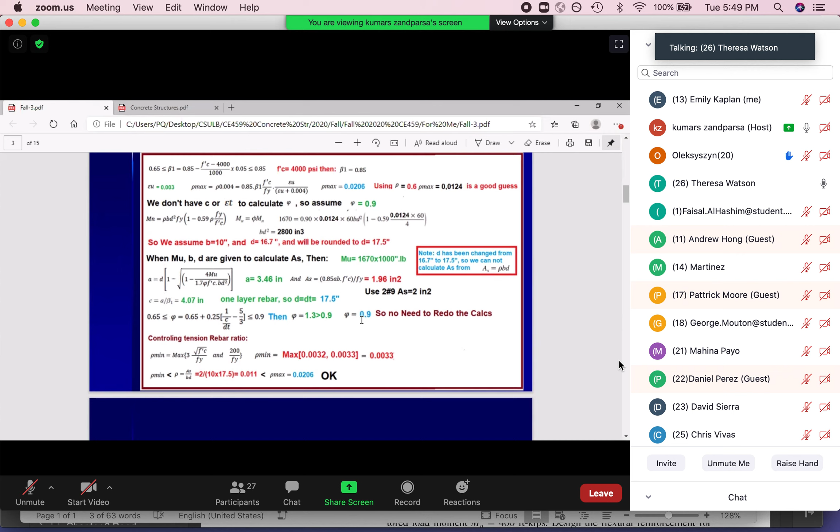Clear? Professor, similar to that question, what would be considered unacceptable then? You said if it's really large, if it's 10, it's fine, just use 0.9. What about if it's under 0.65, is that unacceptable? Not important. Just calculate your phi. There is no limit here that phi should be less than a number. Just when you are going to use this phi, your phi must be less than or equal to 0.9. That's it. If it's 1 point something, don't think about that. Do not use phi greater than 0.9.

Yeah, and why? Because look at this: Mu is equal to phi Mn. If you use phi more than 0.9, if you use, for example, 1.3, it means that the ultimate moment capacity is greater than the nominal moment, and the ACI doesn't like that. The code stops us. We want a factor of safety, not reducing the factor of safety. If you go with phi larger than 1, it means that we reduce the factor of safety.

Is that clear? That part makes sense, but a follow-up question would be: you were describing that iterative process of recalculating phi. How would we know that it's not acceptable and we need to go through that iterative process to recalculate phi? Or are you saying we just don't do that? Yeah, there is no need to do that. Actually, I'm not sure if I understand your... It's because in the last example you wanted us to go through the iteration because we got 0.78, and you said we would have to redo the calculations, but in this scenario we don't.

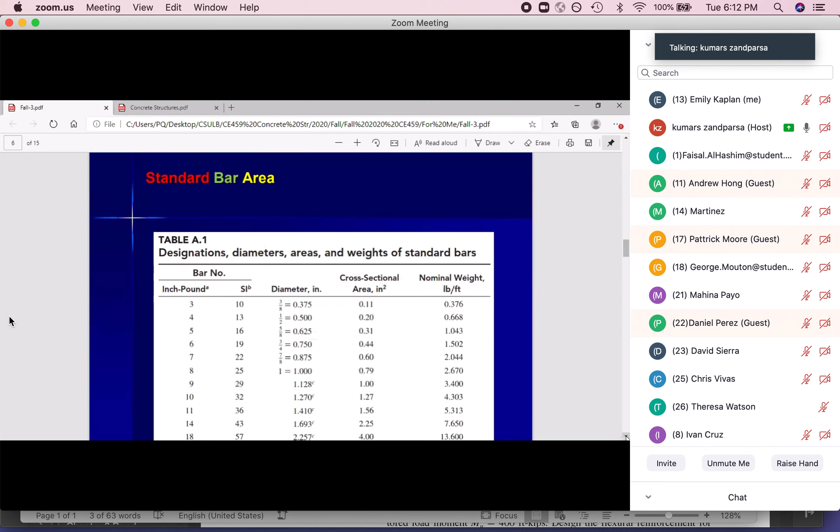Okay, let's go on. These are the rebar that I told you, I put that here just for you. And right now I'm going to solve some examples. I have to cover a lot of stuff. We want to determine the moment capacity for a beam where you have everything. So it's based on the as-built. We know the size of the bar, we know everything, and we want to calculate the moment capacity of this beam.

Okay, we know everything: rebar, compression bar, that's A's. Look at this. 2 number 8, A's from the table, times 0.79, that's the total area. 6 number 10 means 6 times this, the total cross-sectional area. Now I showed you dt, look at this, you have 2 layers, dt and d. d to the center, dt to the bottom.

And we consider 2.5 here, and 24 to this side. You know dt and you know d. So dt is the total h, 28, minus 2.5, and d is 24. And what's d prime? 2.5.

This is your D prime, 2.5. So, let's start to see the step by step that I gave you. I put that here, so if you follow that, you will not miss anything. So at first, calculate the tension bar ratio. Rho is As divided by BW times D, but because here it is rectangular, B is equal to BW. We have everything here, percentage of the rebar.

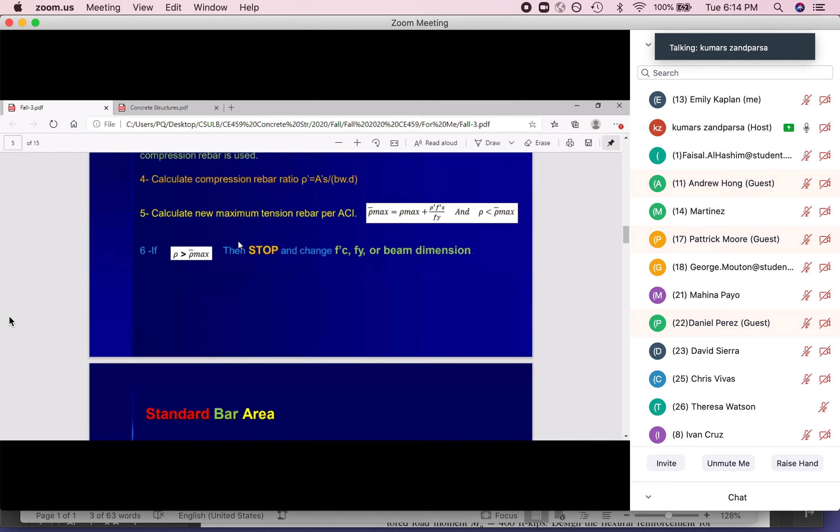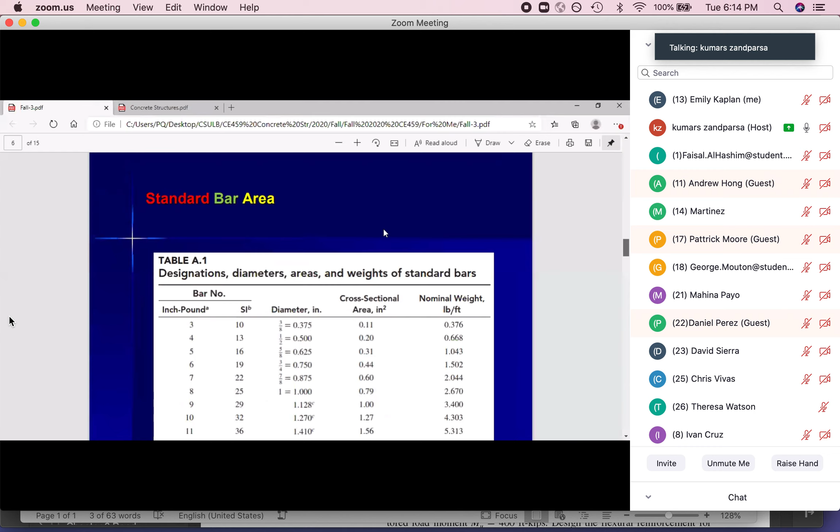Look at this. In the last section, if rho was greater than rho bar max, even with compression, stop, your beam is not acceptable. You have to do something. Okay, so we check this and we notice that the tension bar is more than we need. So what can we do?

Then for this one, assume f prime s equals fy. You can go with any number, but it's always better to go with fy. But if you like the challenge, go and do it yourself with something else to see how you can get the same answer. You have to get the same answer if you go with any number. But it can't be more than fy. Just remember, it cannot be more than fy. Fs or f prime s must be less than or equal.

Okay, and that's the equation for a. These are the equations that you need to write on that paper. That's your a. Put all these numbers, you have everything. You can find a. a divided by beta 1, that's your c. Perfect. Then go and see if f prime s is correct or not. So this is the equation, epsilon prime s times Es. Es is 29,000 or 30,000. I gave you here 29,000.

So 63.8 is not acceptable. It's more than fy, so your f prime s is equal to fy. Like when phi was greater than 0.9, you should go with 0.9. So in this case, we assumed it is equal to fy, so we are good. If it was less than fy, we should redo this, because we assumed fy, but if instead of 63.8 we got 52.8, we should use f prime s equal to 52.8, because it must be less than or equal to fy. If it's less, go with the less. If it's more, consider it equal to fy, the same as phi. I'm repeating to make sure it goes inside you and you cannot forget this.

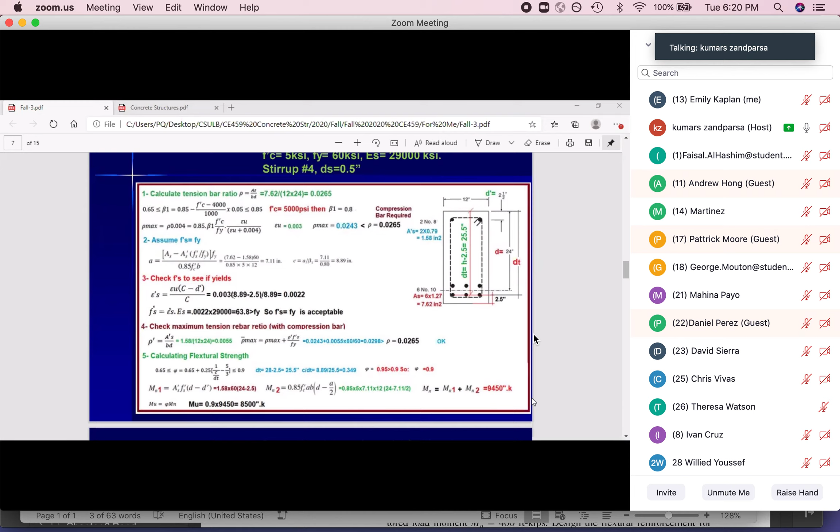So when you find the moment capacity, you are done. You can compare that with whatever you want. Okay, let's go to another example. So in this example, did the stirrups... in that last example, I didn't see them pop up in any of the calculations. No, it's another chapter. We need one chapter for stirrups. This is just bending moment, not for shear. I will go through that in maybe the next 2 weeks.

Okay, so we are going to determine the steel areas for the rectangular beam according to the ACI code. Dead load, live load, simply supported 18 feet. Simply supported means tension at the bottom. B, H, we know everything. And the stirrup number, I gave you a stirrup, because the number of the rebar that you are installing must be matched with the code, whether you can install it or not. So in this case, we are going to determine the steel.

Let's start with this system first. The weight of the beam is included because we didn't mention to consider the self-weight of the beam. So it's included. So w_u is 1.2 dead plus 1.6 live, and Mu, because it's simply supported, is wL squared divided by 8. That's for a simply supported beam. So this one times L to the power 2 divided by 8, that's 211 foot-kip times 12, inch-kip. Times 1,000 would be inch-pound, but we start with kip. Inch-kip, that's the moment.

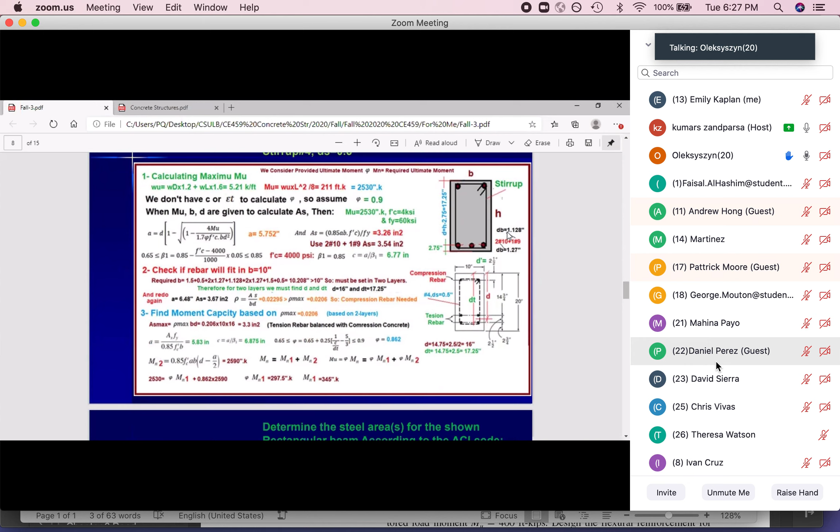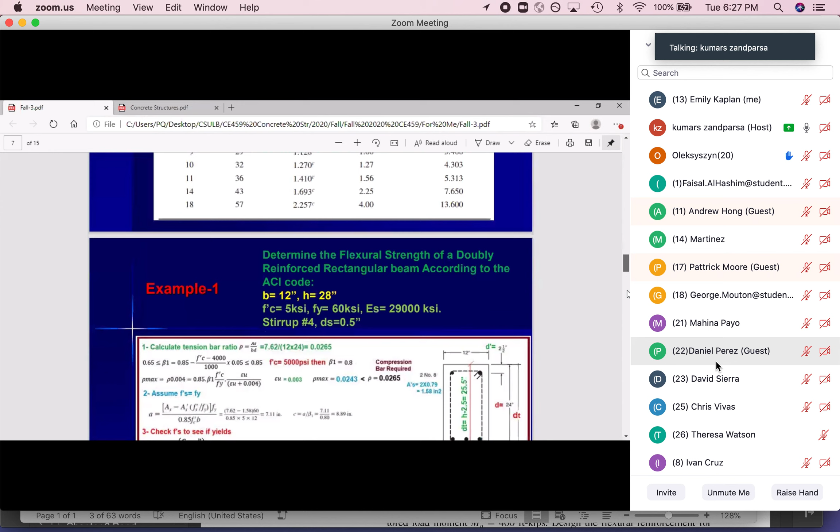From the table for number 9. Go to that table, you can find the diameter. This is the table that I put here. Number 9, diameter 1.128. Number 10, diameter 1.27. Okay, I thought it was the clear cover for those. No, those are the diameters. Look at this, I show that these are for these numbers. So we add them all together, you will get 10.2, and it is greater than 10.

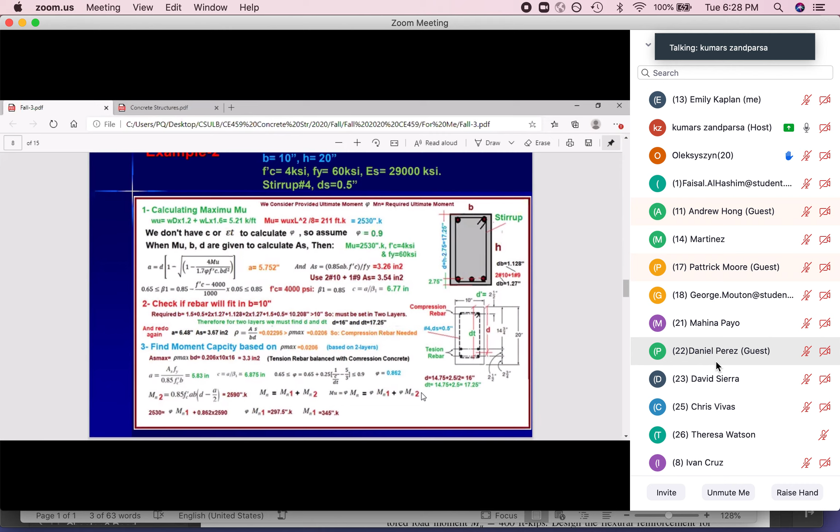So 1 layer is not acceptable. Always you have to check; you can't just put as many rebar as you want and say that's okay. We have to check it. And it's not good, so we have to go with 2 layers. In this case, with 2 layers, based on all these dimensions, I wrote how to calculate D and how to calculate DT. These are the calculations here.

So I will go with 2 layers, and in this case, again with number 4, it should be for sure okay. You don't need to check that anymore because it's very close. If you remove 1 bar, you have enough distance. So in this case, based on this A that we calculated, we have to recalculate everything. We changed a lot, so we have to use a different D. Go to this equation again with the same Mu but different D. Everything is the same except D.

D was, where did I write that D for you? Let me see if it was in the example. Yes, you can see that's correct: D equals H minus 2.75. So you have this D with 17.25. But in this case, we changed that D to 16 inches, so we have to redo everything based on the new D, and we will go to this equation.

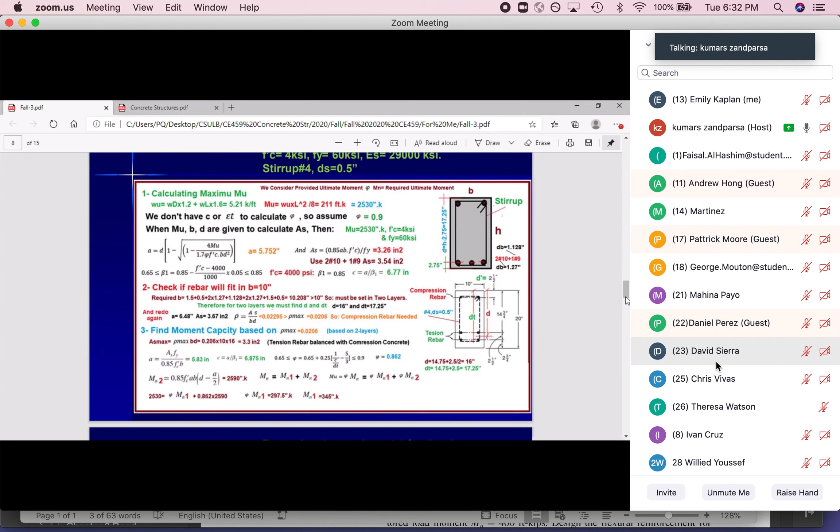Then find Mn2. Mn2 is based on the concrete and the tension rebar. This is a good example for design. At first, I go with the maximum rebar for the tension bar. Then the rest of the load goes to the compression, and you can find the compression bar. So this is the tension bar part. Look at this, let me show this one more time.

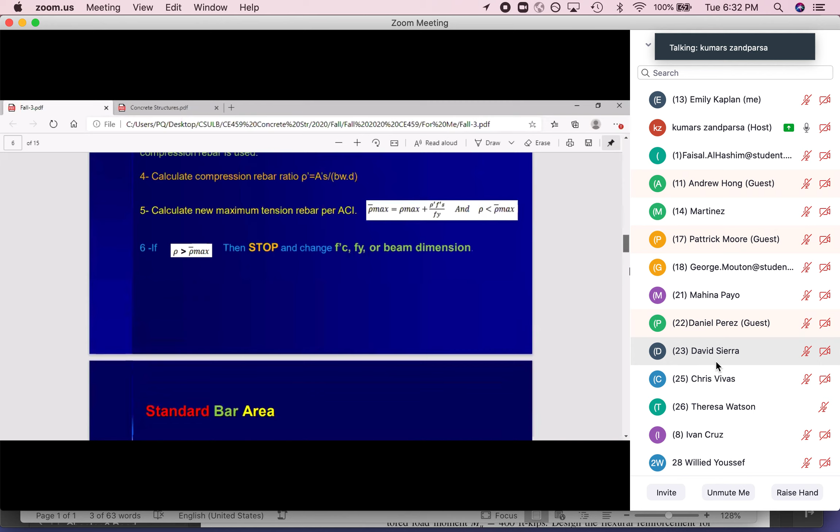Look at this, the bar. Mn2 will come from the tension bar, and for this tension bar we consider rho max for the tension bar only. So with that tension bar only, we calculate Mn2 = 0.85 f'c a b. We calculate a and b. You find this is inch-kip. f'c is in ksi, so at the end you will get inch and kip.

And we know that the nominal moment capacity is Mn1 plus Mn2. We calculate Mn2, and we know the total moment required, 2530 inch-kip. This is the required, so that's our Mu for this side. So I will write this times phi. Mu capacity is phi Mn equal phi Mn1 based on the compression bar plus phi Mn2 based on the tension bar.

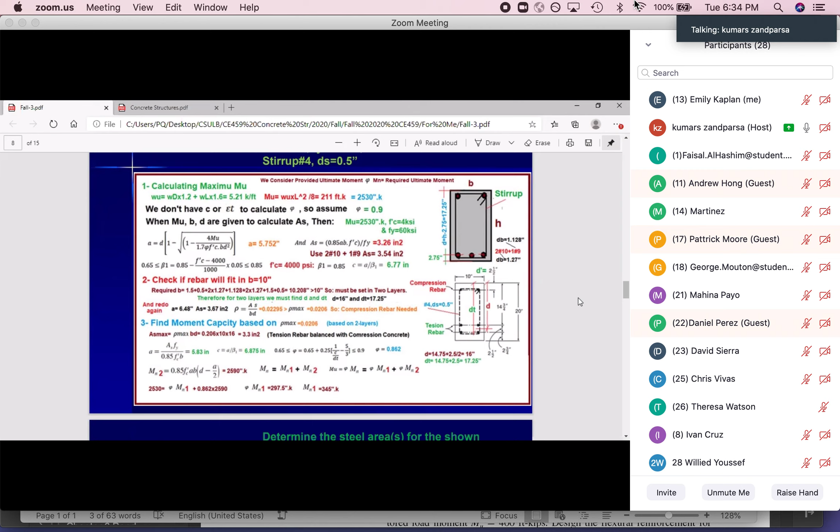So we calculated phi Mn2. We know Mu based on the loading. We want the provided to be at least equal to the required. So required here, phi Mn1 plus phi Mn2, means this one times phi. 0.862, that's our phi. So from here you can find phi Mn1, the moment capacity coming from the compression part, because phi Mn1 is for the compression part. How can I find Mn1? This one divided by phi. So right now we have Mn1, and we want to calculate the rest. You have to come up with the rebar.

Yes, what's the question? Where did we solve for Mn1? Look at this. Mn1, this is the equation. Mn is equal Mn1 plus Mn2. Then, because I always want to use the ultimate moment from loading, times phi on both sides. So you will get Mu. Then this is your Mu, this is your Mn2, this is your phi Mn1. From here, that's the required phi Mn1, then the required Mn1. Then go after this one.

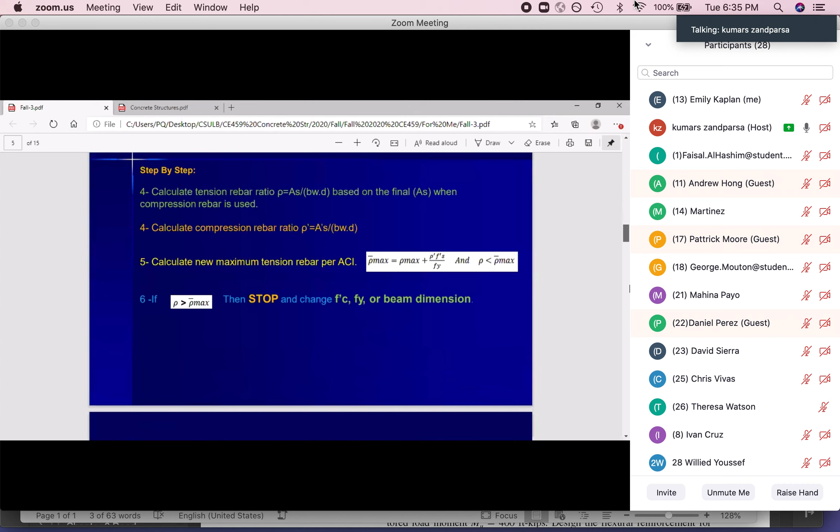Let's go back, and with that equation, I want to find A's because I know Mn1. We calculated it on the last slide. So I rewrite this based on A's, plug in the numbers, and you can find 0.462 square inches. But most of the time it's too small a rebar, and it's better not to use that. We went with 2 number 6, which is much bigger than this. This is experience. Why are we not using that small? Because those are very teeny tiny rebar.

If I use those too small, during construction you are walking over these beams. You can bend them, and you will lose the distance d between compression and tension rebar. If you make it smaller, the capacity will reduce. Because of that, with our experience, even if we don't need this big, we will go with 2 number 6 to make sure if they walk over those rebar on top, they cannot bend them easily. That's the reason why we pick much bigger. But for the bottom rebar, it should be close.

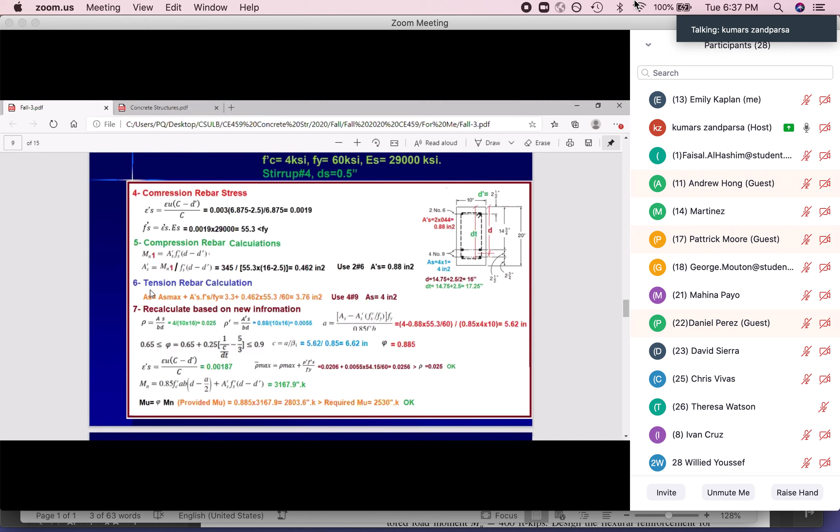Then the tension rebar calculation. How can we calculate tension? We assume As is equal to As max, 3.3. Then plus this rebar, A's times f's divided by fy. So it should be 3.3 from As max plus A's f's over fy. We calculated it here, based on this. We used that number, but you don't need to go with this because it's too big.

We don't need that. We need this one. Just remember, in this equation, whatever you need, don't go with that. Go with this, because we don't need this big. We did that based on experience. So in this equation, go with what you need based on the calculation.

So A prime is 0.462 times f's. You can do this one. So this is the rebar that we need. We will go with 4 number 9, total AS 4 square inches. Then I have to check if it's not less than rho bar max. So I calculate rho bar.

Rho is AS, what we use, over BWD, that's rectangular. Rho prime, do the same with this number, what we used, in this case, because we used bigger. And this one is good too. Look at this. If I use bigger, rho prime will increase rho bar max. That's one of the solutions.

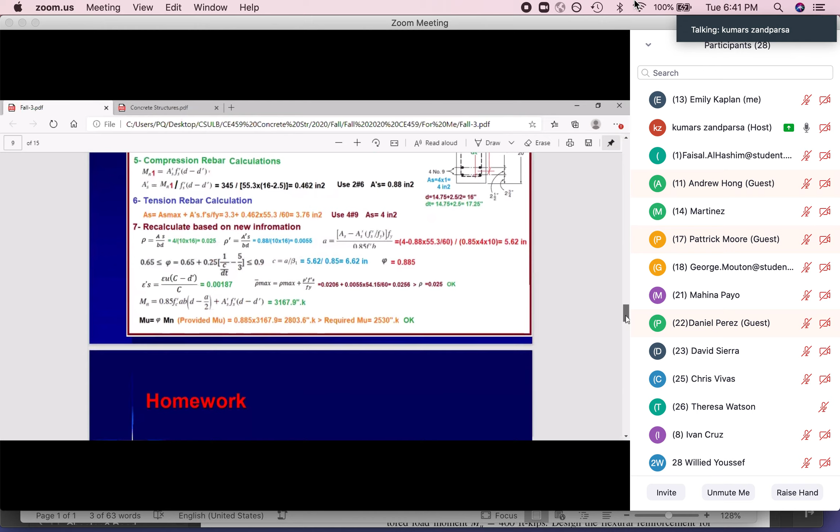That's the solution. You can see this part is not as easy as the tension one, and you have to do harder work on this one. It's not that easy. And like before, please work on the examples, try to solve them by yourself. Then go after the homework. Otherwise, you will get more problems on the homework, and you'll see why you can't solve them. Maybe you cannot solve the examples as well. Just try those first, and then go after the homework.

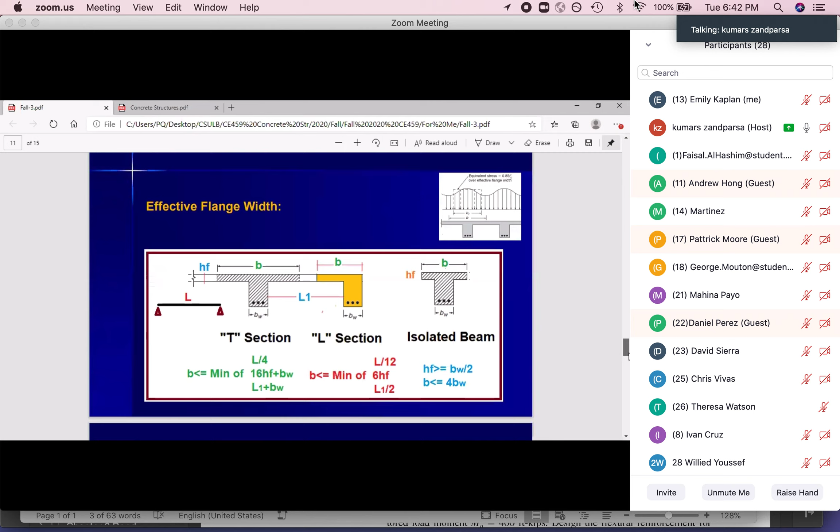And yes, what's your question? Can you go back to the last example on the last slide? Sure. Here. Yeah, so you went pretty quick, and you said we should change rho or rho prime when we get to the rho max equation.

Yeah, look at this. We did that. We find the maximum rebar that we used. We used 4 number 9. Is that correct? So it means 4 square inches. And we use 4 square inches for rho. For rho prime, do not use this number. Use whatever, for this rho prime, yes. Sorry about that. For this rho prime, yes.

For that AS, do not use that A prime S that we used. Use whatever we calculated for AS, not what we used. So for this rho prime, use this here, and then put this in this equation, and then you can see with rho prime whether you are good or not. Okay, thank you. Did I give you the answer?

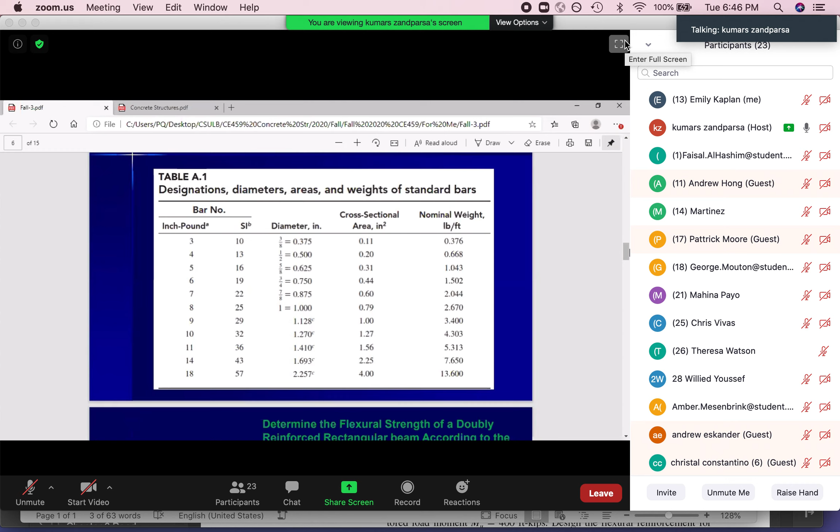And where do we get that? Is it in the ACI code book? The rebar? Which part? Like the number 6 and knowing that's 1 inch squared. You said we get that from the table? Yeah, the size of this, you're talking about A prime S? Yeah. A prime S, I show that. Look at this. That's the table. Number 6, you will get 0.44 square inch for each one. We have 2, which means 0.88. Okay. Awesome. Thank you. Okay, very good.

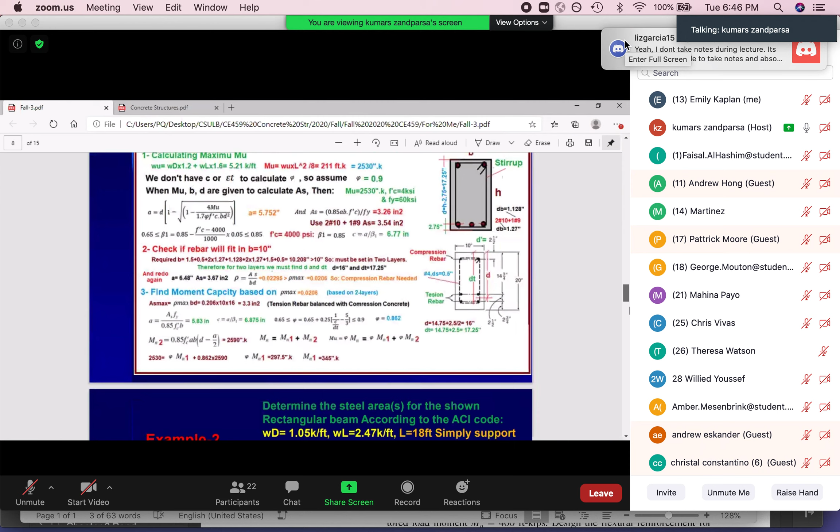Okay, so is there any other question? You said we could go over homework in lab tomorrow, correct? You can go over the homework, yes, today's lab or tomorrow. Tomorrow is better because today I have this class, then I have lab and I have to give you a lot of other information. If you can come tomorrow, after the lab hours, you have the whole lab to ask your questions. Can we go to both labs, either or? Yes.

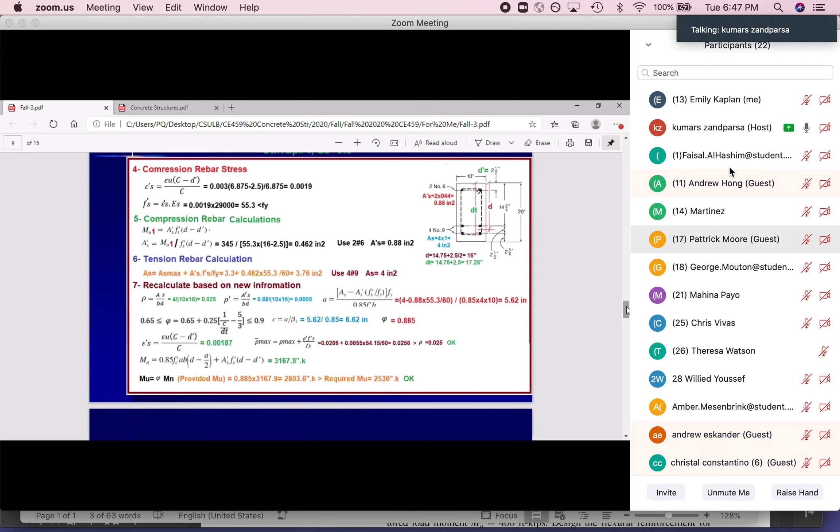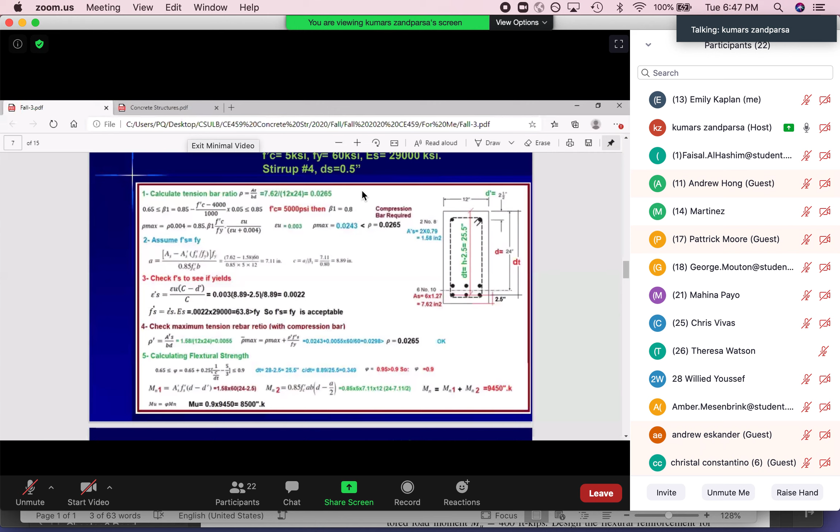Wednesday is better because it's almost 2 hours I'm talking. Then for the lab, I am going to talk at least 1 hour or more, so I don't know how many more questions I can answer. But tomorrow I have just lab, so you have the whole 2 hours for your questions. I prefer you come tomorrow, but if you have questions today, stay, and I will answer you. What time is the lab tomorrow? Tomorrow should be 5 to 7:45. Please don't come that late, because if nobody is there with questions, I'm not staying, unless I know what time you are coming.

My question is, do you have a preferred office time we can schedule once a week? What about Wednesday after about 6? Between 5:30 to 6 you can come, all the way to 7:45. So every Wednesday from 5:30 to 7:45. And that won't interfere with the lab the Wednesday class is enrolled in? No. In lab I'm going to give them some information, like today. That will not last that long. The rest of the time is for answering your questions. Okay.

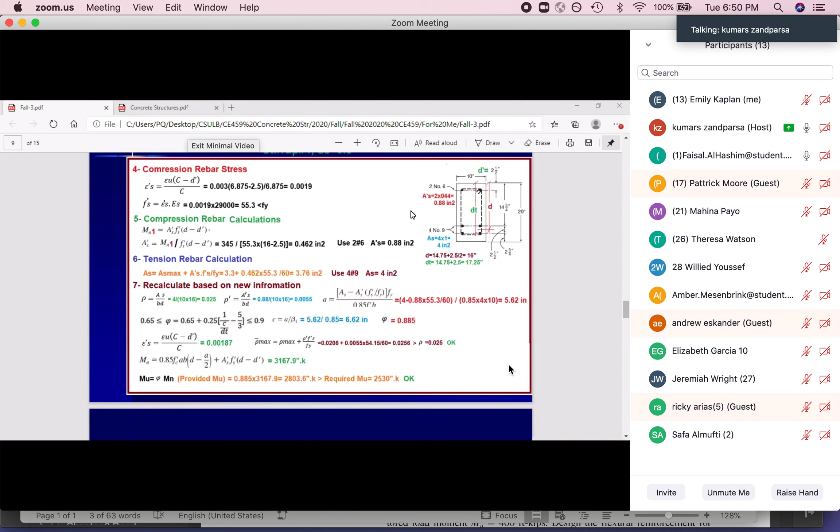So, do you want to stay for the lab? I have class during the Wednesday lab. If you have no question, you can go. If you have question, please stay and ask. Professor, is everyone required to attend the lab? Sure. So everyone is coming tomorrow for the Wednesday lab? Are you assigned to Wednesday or Tuesday? Wednesday. I sent you 4 emails to give me the answer. Did you answer me? Yes. Okay, very good, thank you. For the lab, you must be in the class. Alright.